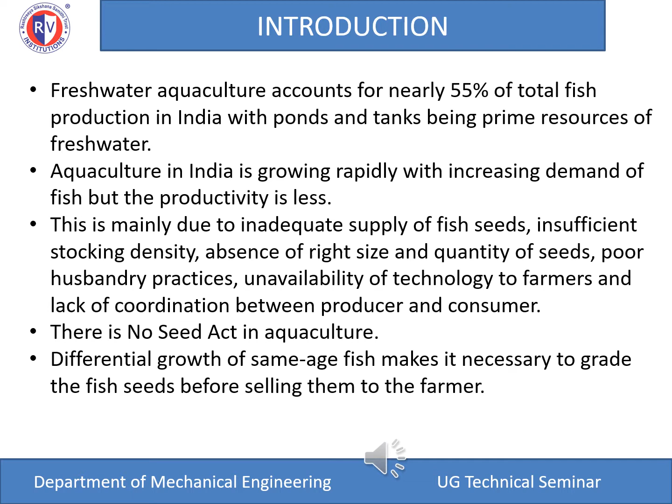The main motivation of this project is to introduce proper grading and counting mechanism to Indian farmers and vendors for their benefit, that eventually lead to growth of aquaculture industry in our country.

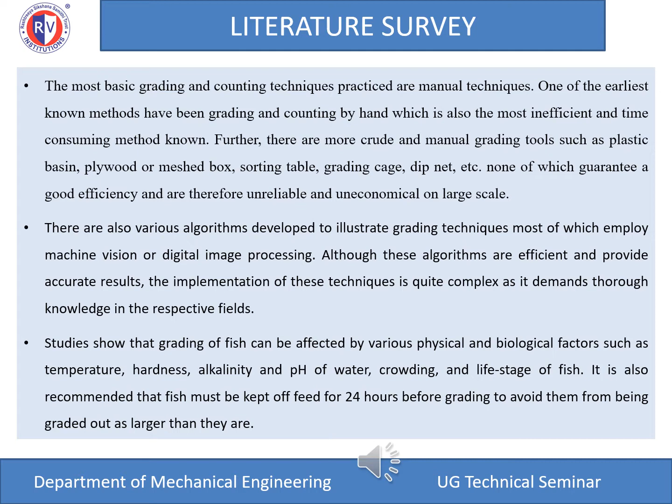One of the earliest known methods has been grading and counting by hand, which is the most inefficient and time consuming method known. There are more crude and manual grading tools such as plastic basin, plywood or meshed box, sorting table, grading cage, dip net, etc., none of which guarantees good efficiency and therefore unreliable and uneconomical on a large scale. There are also algorithms developed on basis of machine vision, which is difficult to implement.

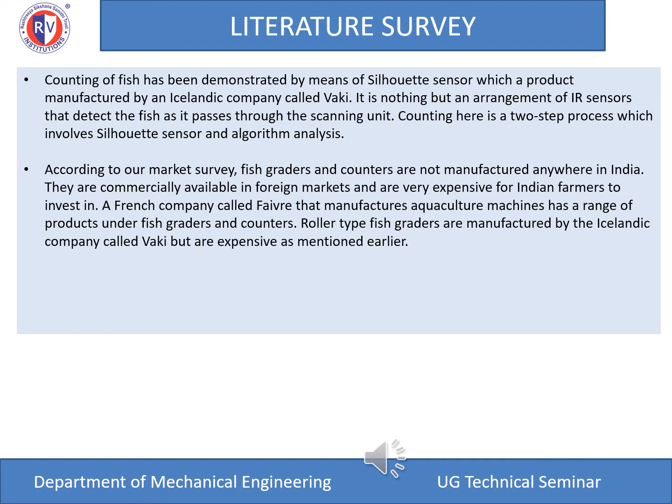According to market survey, fish graders and counters are not manufactured anywhere in India. They are commercially available in foreign markets and they are very expensive for Indian farmers to invest in. These are some of the foreign products available for grading of fishes. As of now, there is no such product manufactured in India.

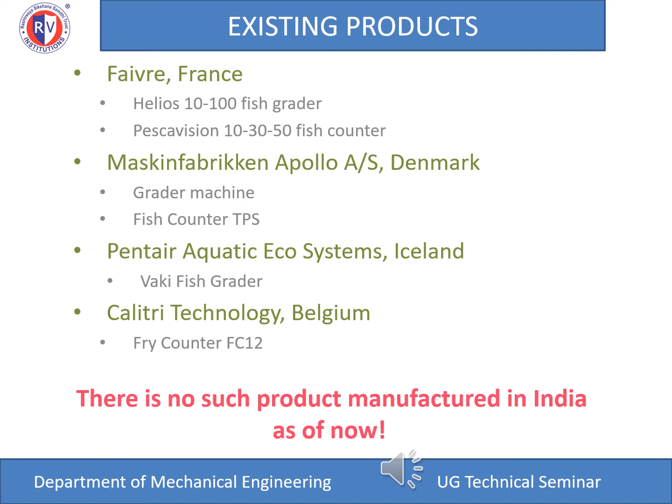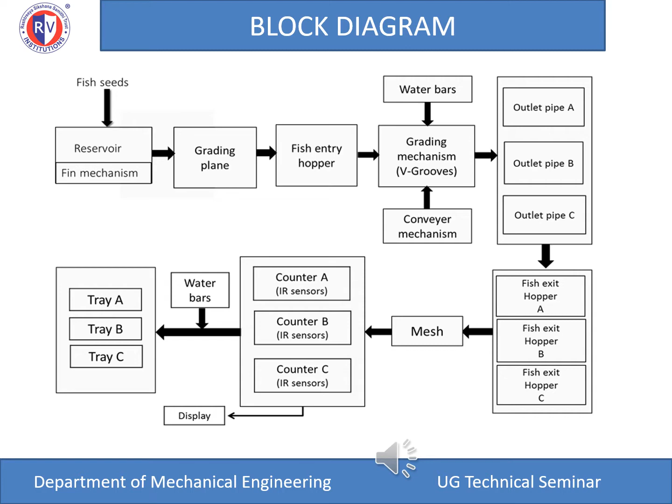From fish entry hopper, fish seeds will fall onto grading mechanism, that is V-grooves. With the help of conveyors and water bars, the fish will fall onto outlet pipes based on their sizes. From each pipe, fish will pass through counters and at the end, it will get collected in collecting trays.

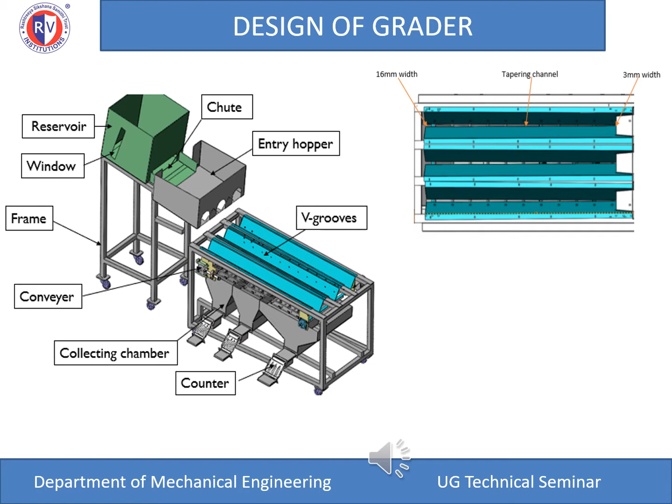In this grader, the fishes are graded based on their thickness. Below 3.75 mm thickness is collected in one pipe and they are called fries. Above 3.75 to below 6.25 mm thickness, they are called fingerlings and get collected in another chamber. Above 6.25 mm thickness get collected in third chamber and they are called advanced fingerlings.

Main features of this grader are fish seed grading, counting of graded fishes, mobile grader counting system, independent grader and counter, and also provisions for control over various parameters such as conveyor speed, fish flow rate control using stepper mechanism.

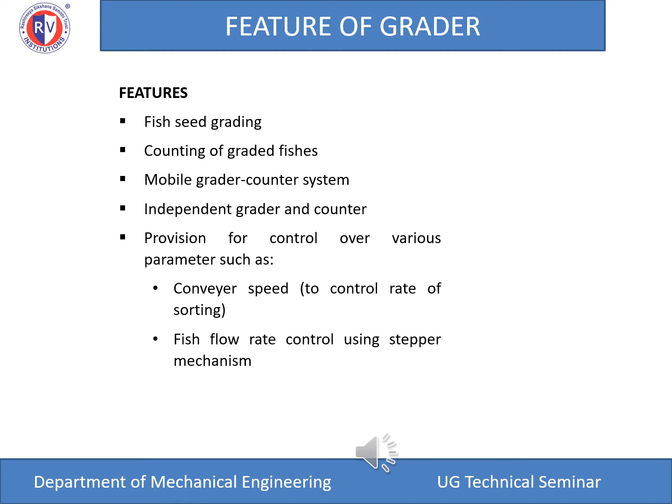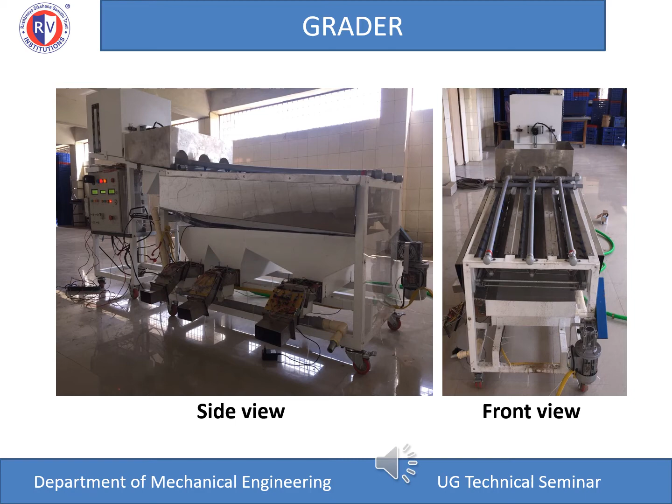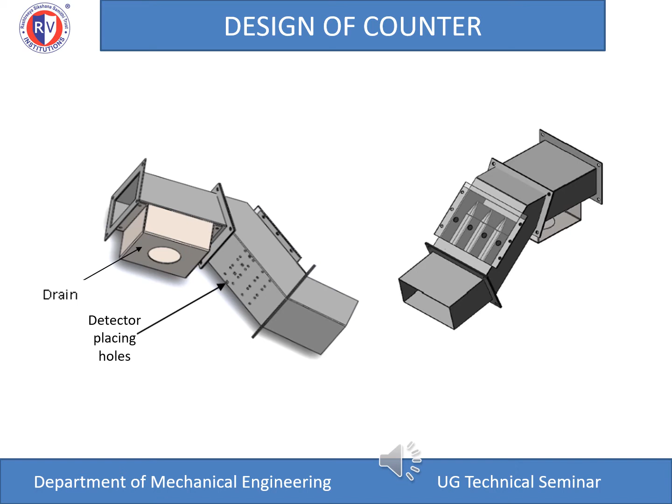Here you can see the 3D model of counter, which contains a laser detector and a mesh to drain water so that it won't interrupt the counting of fish seeds. This is how the actual assembly of the counter looks.

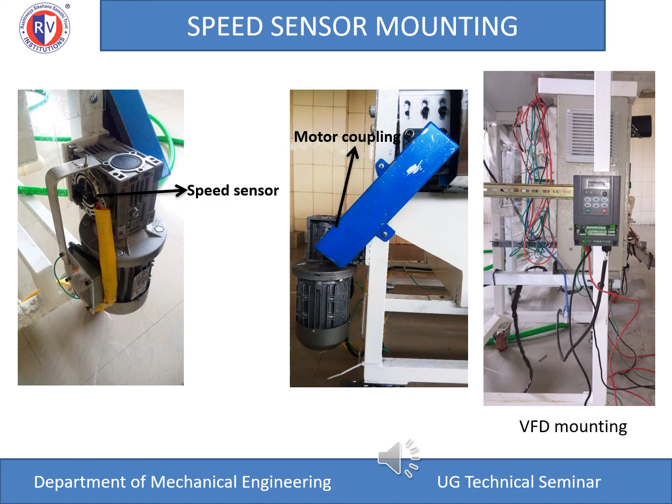These are the sensors to monitor the speed of conveyor, which is powered by variable frequency drive motor whose speed can be varied manually.

This image shows the flap valve assembly, which is actuated by stepper motor to control the flow of seed along water from reservoir.

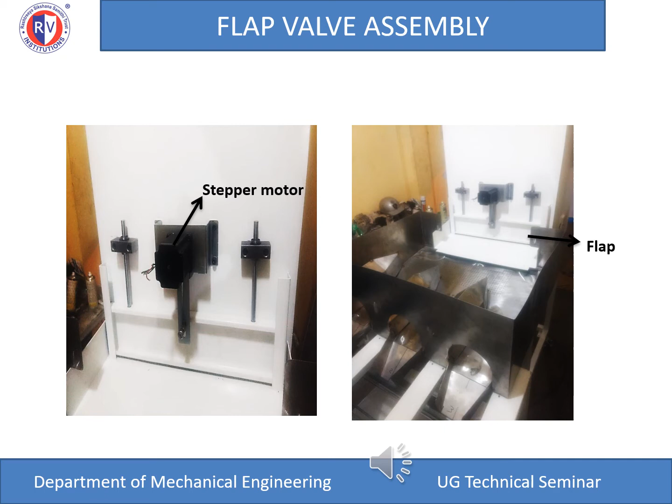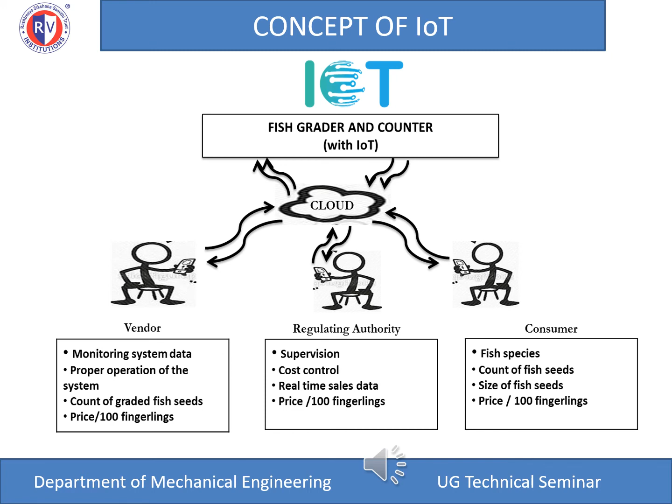This block diagram shows how IoT can be used for the same. Through this, proper rules and regulations can be set while transaction between vendor and farmer happens.

Blynk app is used for the control and monitoring of the process. These are the controls and monitors available for this fish grader.

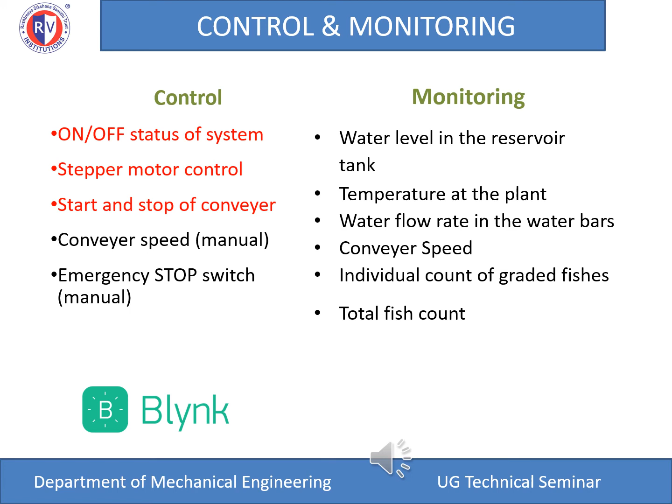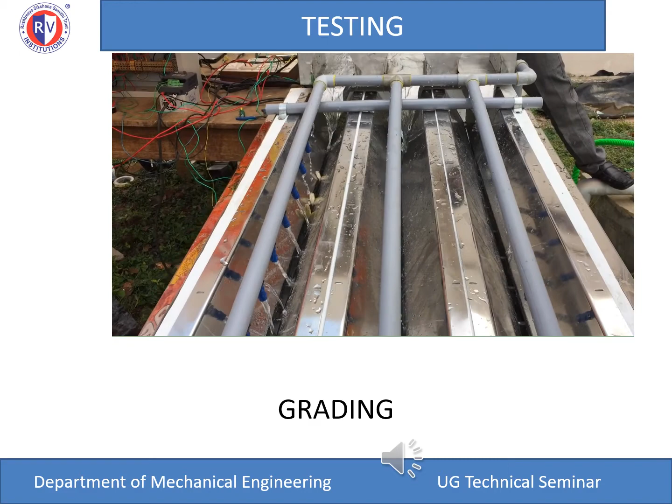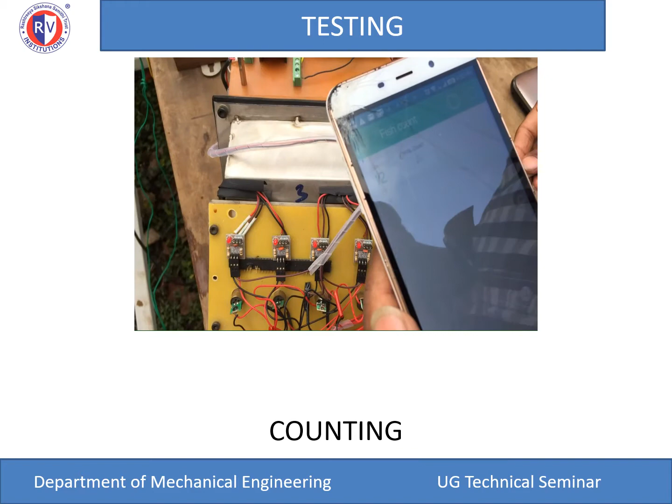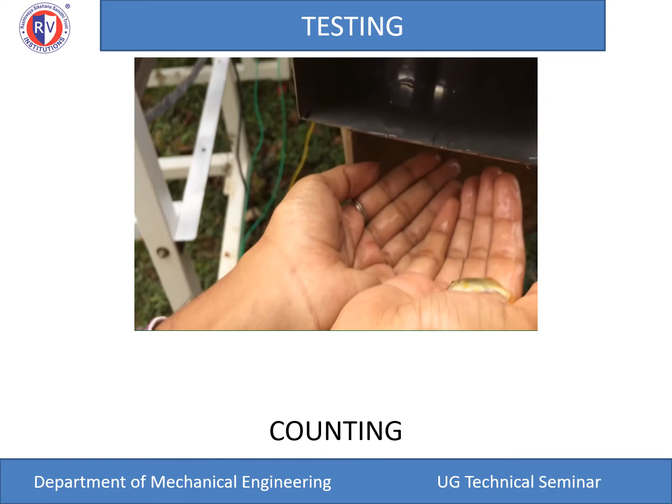Video showing how grading happens in the grader. So we have an initial count of around 12. Now I am inserting a fish into the counter. You can see that the counter is incremented to 13 and fish is coming out. Same way, I am inserting again.

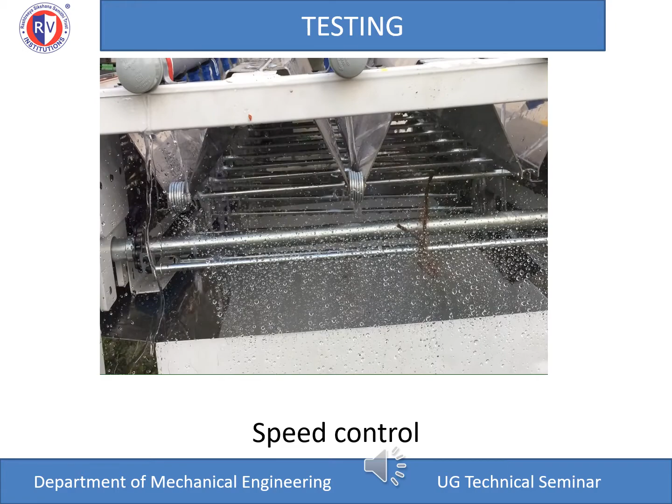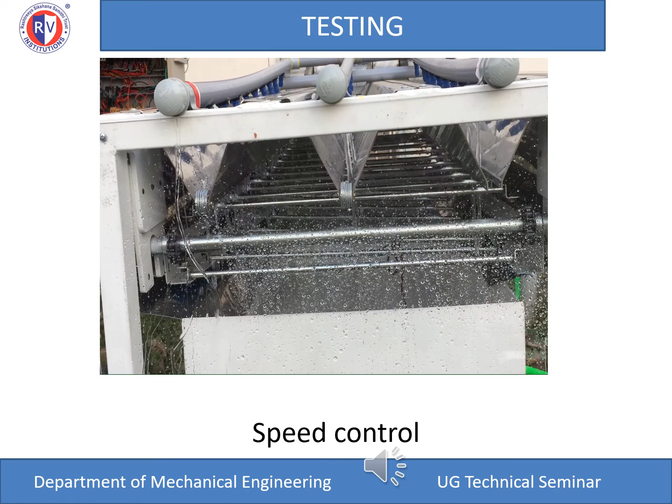Manual speed control of conveyor is employed to push the fishes forward in the V-grooves in case they are overcrowded or stuck at any point. The speed of the conveyor affects the rate of grading of fish seeds.

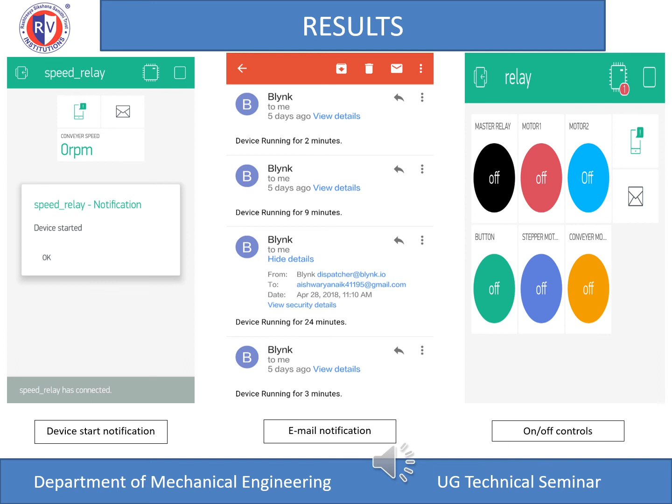These are the results obtained through Blynk app, which has on-off controls and email notifications. Also, we can use Blynk app to monitor the fish count, conveyor speed, temperature, and flow rate.